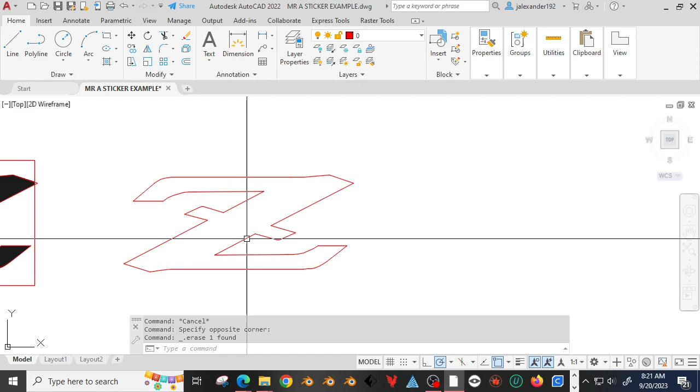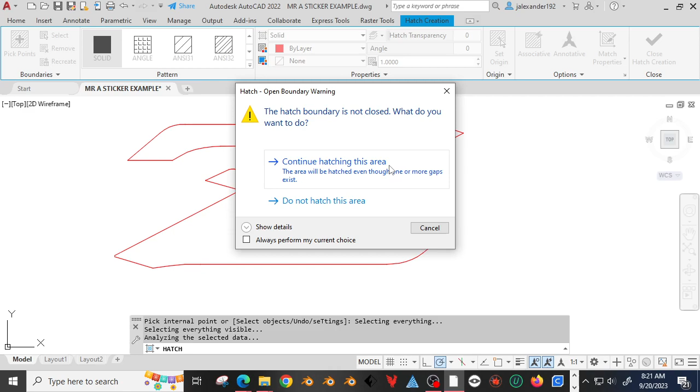Before you hatch, it's a good idea to check and make sure there's no open pieces, because if there's a small opening, it just won't work right. If I had a little opening like that and go to hatch, it could possibly work, but it usually will give you an error, like it says the hatch boundary is not closed. Even though I'm zoomed out enough, I can't see that error over here. Sometimes it'll actually give you a little red circle, but in this case, no.

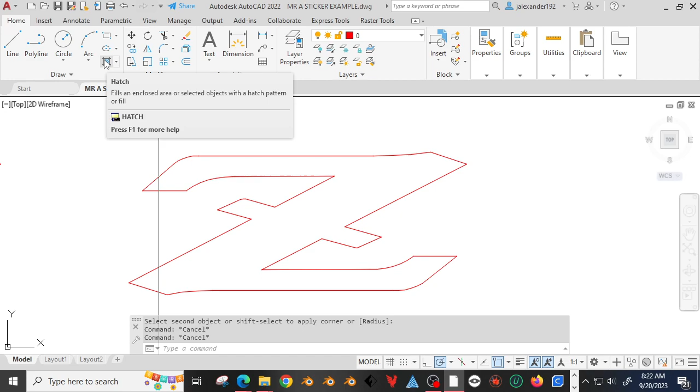So I'm pretty sure that's closed. I'm going to do the hatch command. The hatch button is at the upper left. Basically it fills it - if you've used Paint Bucket in another program, it's very similar. You can click the button, or you can type H for hatch.

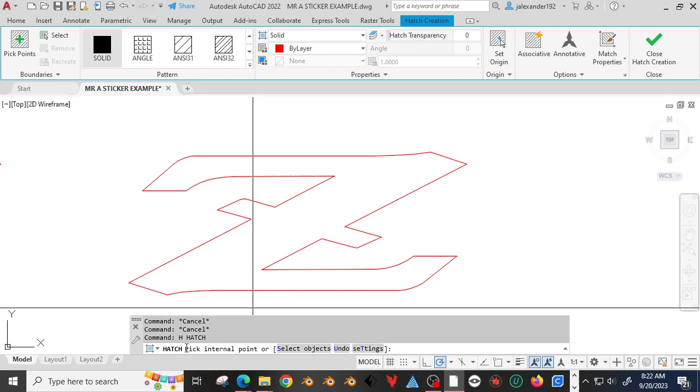First thing it asks me, at the bottom where my cursor is, is to pick an internal point. If you have your cursor in the middle, it may automatically fill that up. Sometimes it's glitchy, sometimes you have to zoom in and out, and sometimes it just wants to be a pain. But in this case, it worked okay.

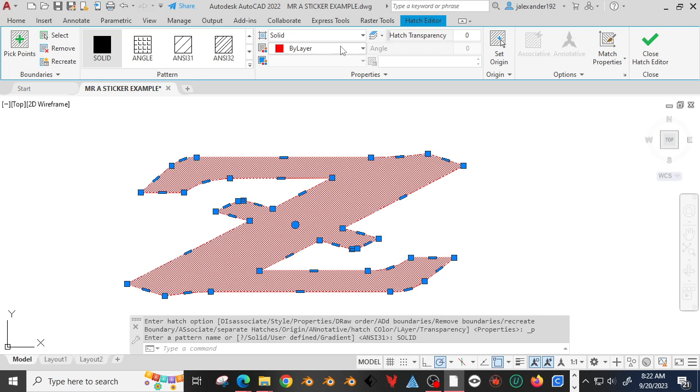Now if I want to change the color, I could either click on the hatch again and change the patterns in it, or the colors right here. All right, so that's the hatch.

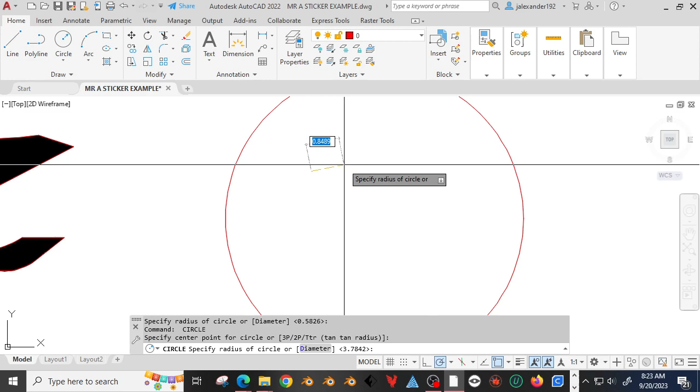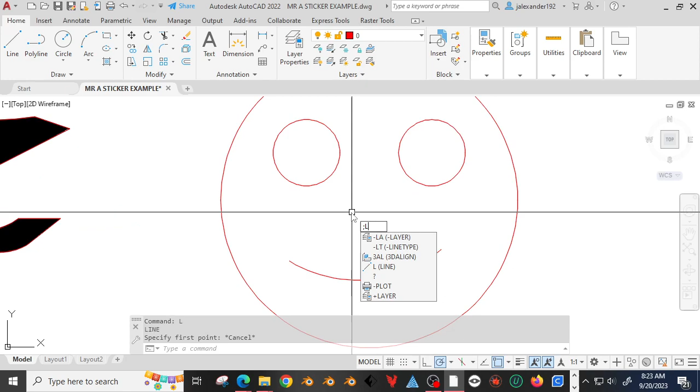Now we're going to use the hatch to test if our stickers are going to work correctly. This one has no problems, but if I make a smiley face... that's not it. Smiley face is going to be a bad smiley face, but it'll get the point across. I want to give him a square nose. Okay, so that's my scary smiley face.

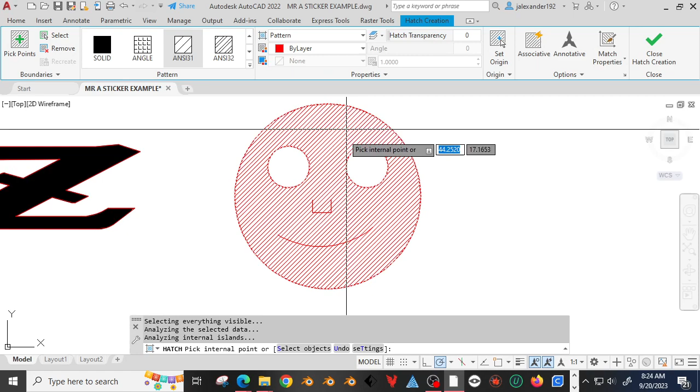I'm now going to use the hatch pattern, especially if you do the hatch at the same color, and it will give me an idea of how well this works. Right now it's the pattern, but if I click solid, now you can see you just won't be able to see certain parts of this. So if you have a sticker you're concerned about, or that's a little complex, or you're seeing single line things on the inside, this is definitely worth trying out.

There's a couple ways we can fix this. First way is to use the hatch - we gotta use the offset command. So the offset shortcut is O, and I'm going to hit space. Now it says to specify the offset distance.

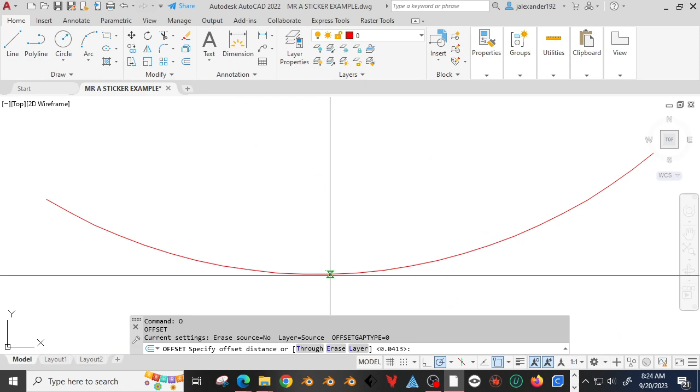In this case, I'm going to draw a line. I'll start here, and draw a line out to maybe here. After I click, it says to select the object, so I'll click that, and then you just pick what side you want it to be on. Okay, so now I got an offset line.

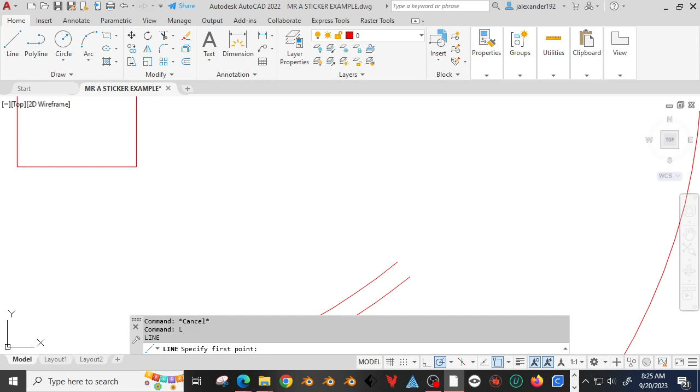I have to close this up. Oh, that was a mistake. Okay, so L for line. And now the nose is still going to have a problem.

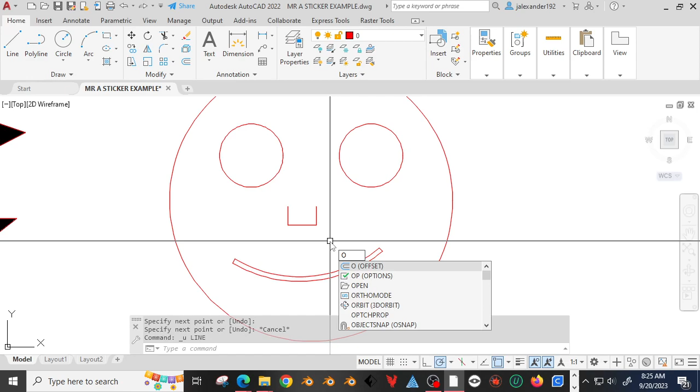Just a couple ways I can either close that up this way, or I could offset that again. And if I go back into offset, it will remember the last setting that I drew that line. It actually tells me it was 0.1234, which works for me. So if I want to keep that same distance, I'm just going to hit space once.

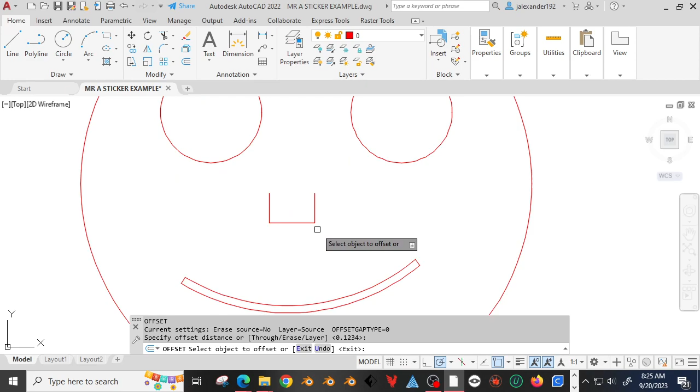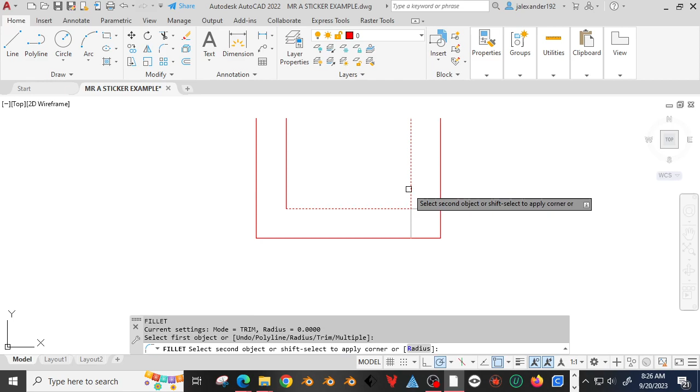I'm going to click on the line and clean it up. I can either use trim or fillet. This is a trim—you just click on those. If I used fillet, I'd hit F, and make sure it says radius 0, or you can try it and see what happens. There's that, and then it's just a matter of closing it up.

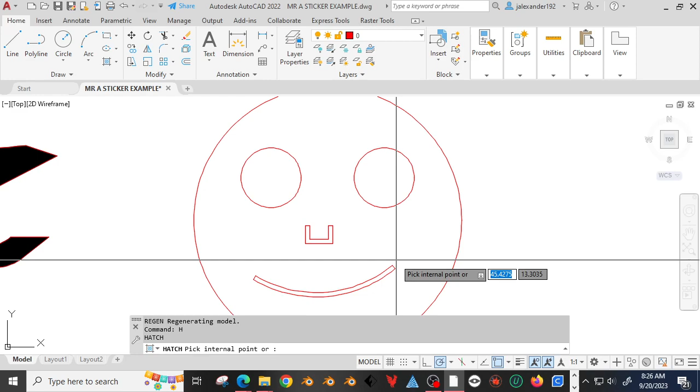Okay, let's try this one more time with a hatch pattern. It's telling me the boundary isn't actually closed, which you can see what happens when it's not. Let me just check—I think it's actually fine. I'm going to zoom in a little bit and try again. All right, I don't know where the problem is. I can try typing RE for regenerate, hopefully it'll work this time. No, well, that's interesting. I'm just going to keep checking.

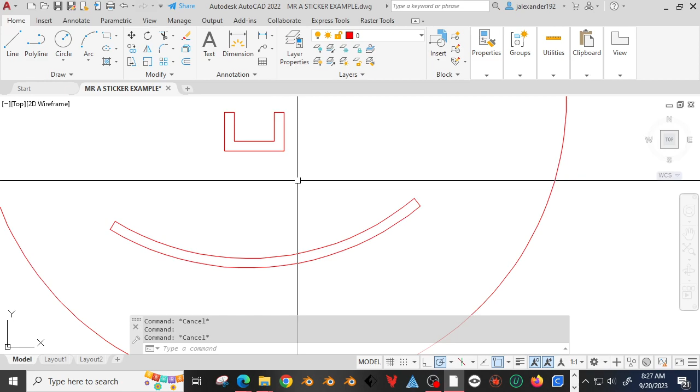There's a trick we can do, because sometimes it just doesn't work—this is actually a perfect example. A couple tricks: you could select everything and type the J key, which gives you join, and that should join everything. So now the mouth is one piece, the nose is one piece.

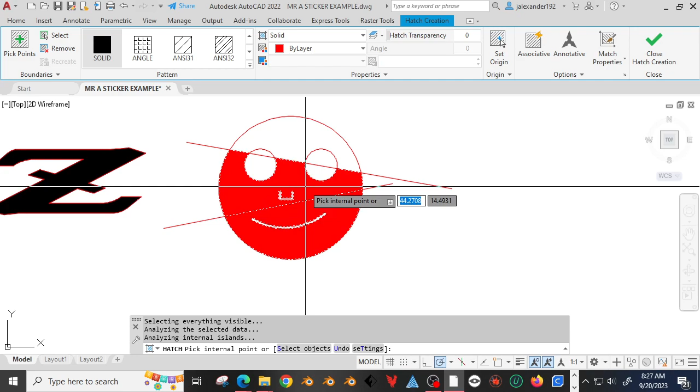The other way is you could cut this up into sections. Let's say I do a temporary line here, maybe right through here. So now when I hatch it, it'll certainly work, and I can click all 3 parts at one time. I'll delete these, and you can see it's still basically one piece, and it gets the job done. That's actually perfect that it gave me an error, but now you can see how you can test your sticker.

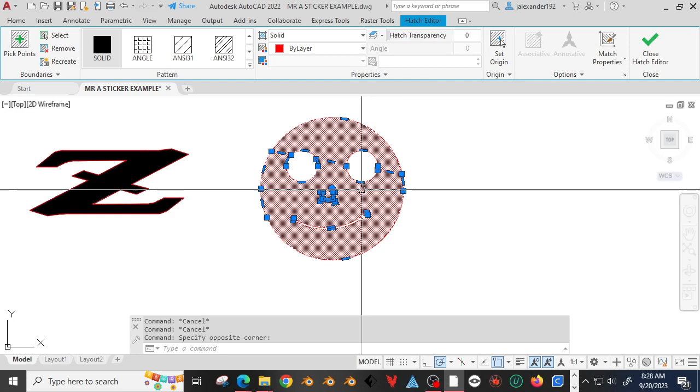You can use offset to give it a little bit of thickness. There's one other time you might want to do an offset—if I had an intersecting line. Let me see, delete this. So if I had something, let's say maybe I don't know, maybe a hat. So I put a hat on his head.

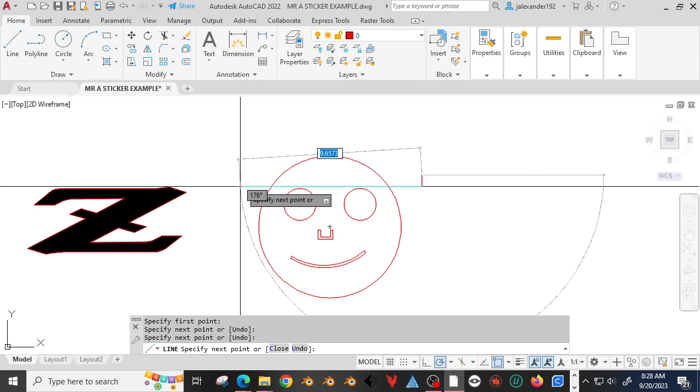That's good enough—all right, there's my messy hat. You're definitely going to want to trim out anything that overlaps. But now I want to be able to see this brim, and if I hatch this, hopefully it works all the way through this time. Of course it won't—I have to cut this up again. Try that. There.

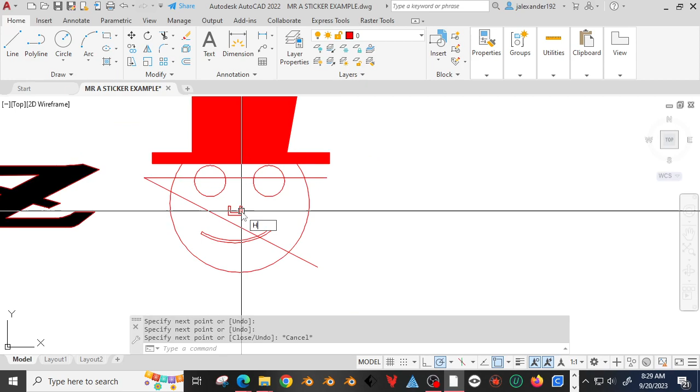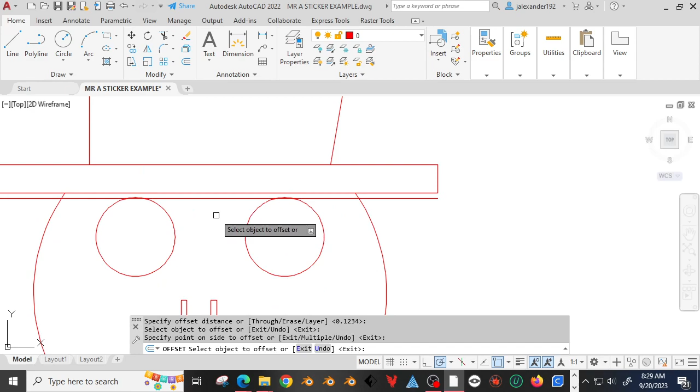All right, so my hat—it works, right, but it's losing some definition. So what I'll do is use the offset tool just like we did before, even keeping the same settings. Now that might be an issue—I'll move the eyes down in here. Okay, so I offset that line, and then it's just a matter of trimming that out. So now when I hatch it, it should look okay.

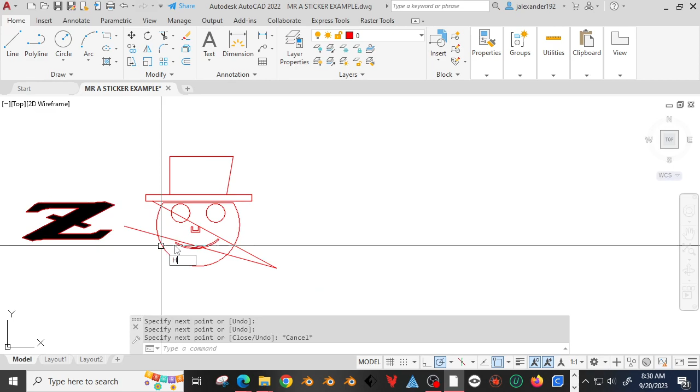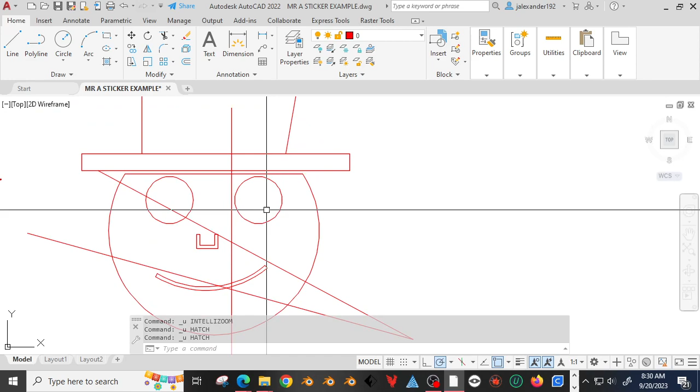1, 2, 3. Oh, do an extra one. Oh, that's giving me issues, isn't it? All right, so ultimately this will work—I just don't want to fumble around right now.

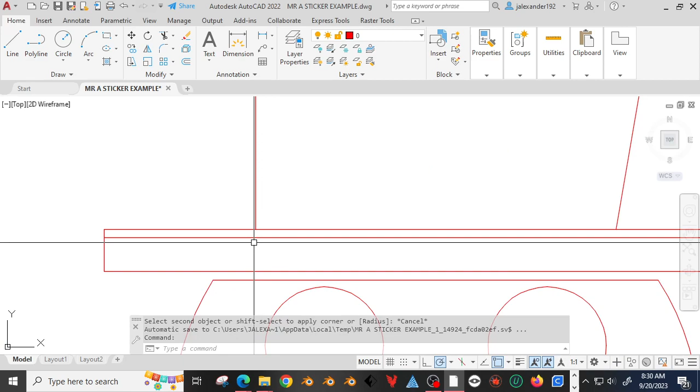The hat also might want some more definition too, and then I can be done. So if I wanted to see this brim as a separate entity, you want to do an offset in the right direction. I know I'm doing things fast, but now it'll give you the idea—you can still see the brim. It just gives you a little gap in between, just for it to visually look good. Let's see if this will let me do this. Hey, there we go. So voila, it's not a great sticker, but it would cut out—you'd be able to see everything, and that's really all there is to it.